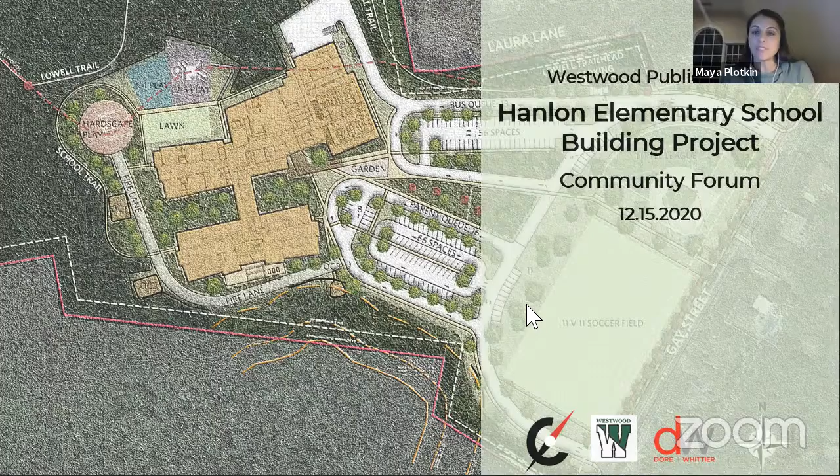So without further ado, I am going to turn it over to Rob Fitzgerald, who's going to kick off our presentation. Thanks, Maya. So tonight, we're going to give a little bit of an overview of the schematic design inspiration and an overview of the project itself. We'll talk about schedule and phasing, go over some cost estimates that we've just received, and then review next steps.

So just a little background on the project. Located right here is the existing Hanlon Elementary School site. And the proposed project is located here just behind it on the Shuttleworth property. The Shuttleworth property is about 37 acres and it's owned by the town. It's dedicated for municipal and school use. The proposed project is planned to encompass roughly around 9 acres, which will add to the approximately 8.5 acres of the existing Hanlon site.

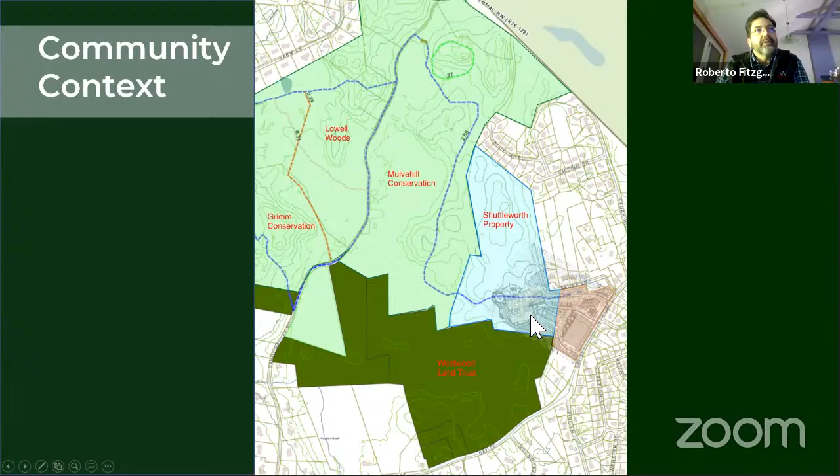One of the things we found when we were just starting to look at this property is that there's actually about 300 acres of wooded area conservation and trust land behind the Shuttleworth property. This really led us to take a closer look at those woods and use that as an inspiration for our design. So we took a walk through that area, looked at the materials, the stone, the earth, the wood, the colors, and so forth, and really took that and ran with it when we started thinking about building in a number of different ways.

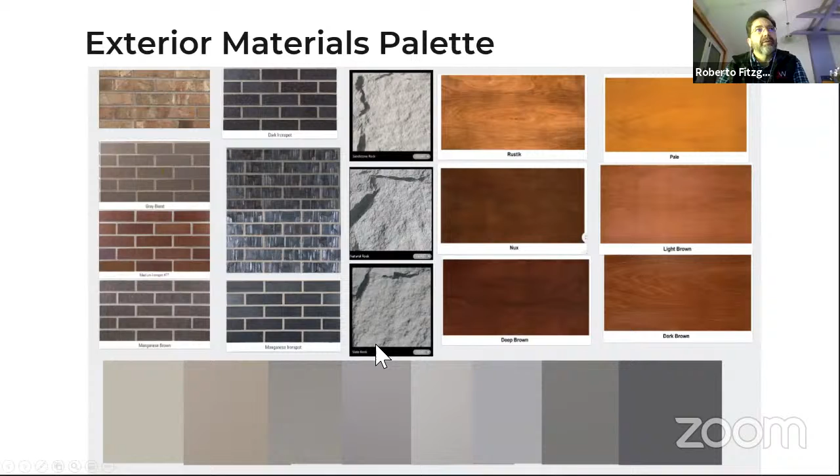One of the ways was, of course, the exterior materials, and so we started looking at trying to keep a neutral look with some grays and browns and wood type tones.

We began to look at different types of buildings, a variety of different types, and created an inspiration board. We shared that with the aesthetics working group, a subgroup from the school building committee, and invited the full committee to participate, then held a public community forum to share this and receive feedback. Through that whole process, we took a lot of information and feedback from the comments and integrated it into the design as it progressed forward.

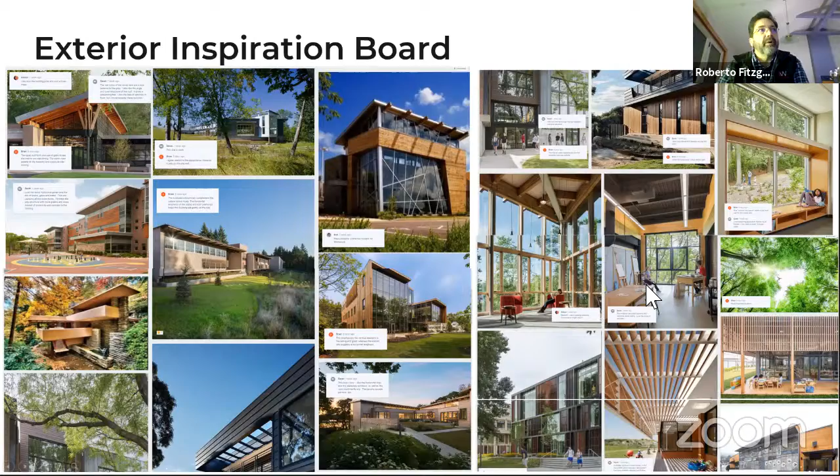Diving into the site plan, I'll give a brief overview. The existing school is this dashed black line that you can lightly see in this area, and the proposed building is over here to the west.

We're proposing a bus loop that would enter in from the north, loop around, and exit back out. And then a parent drop off, which would come in from the south, loop around, and exit out. What this does is allow us to have this walkway.

We know that with the existing Hanlon School there are a lot of walkers who go to the school, so it was important for us to create this unobstructed walkway leading up into the building for students. The other element is the athletic fields, creating this green band along Gay Street as part of the community aspect of the project, with easy access, providing a green park area for community use.

Then further into the site, we have the building. Speaking of the public areas, Maya will go over this a little more later in the presentation. But on this side of the building is the public or community side as well as student use. The gym is located here, the cafeteria is located here - these types of spaces like to have easy access to parking for after school events or weekend events.

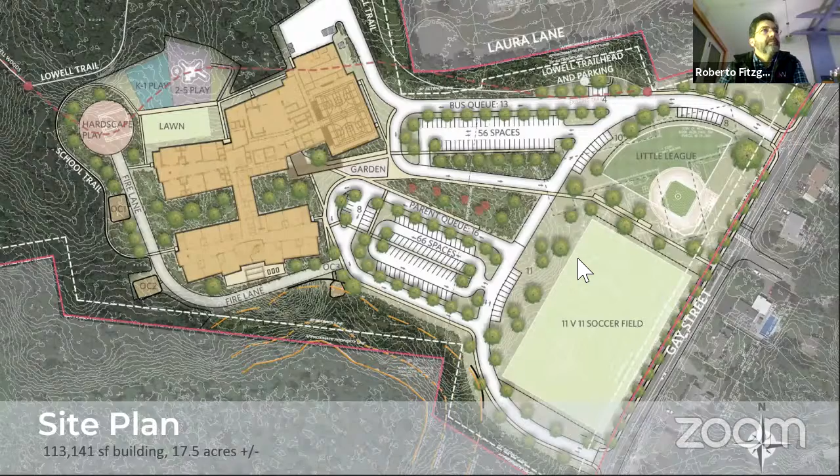One of the updates we have to the site plan was developed after continued discussions with the police and fire chiefs. The idea here is to extend this fire access road instead of having a turnaround space and exiting back out. There was a strong desire to provide a second means of egress out of that access road, so this extension provides a full loop around the building, just for an emergency situation.

Normally this would be closed off throughout the day at both ends, so there's really no traffic back there - it would only be used in an emergency type situation. There would be a hard surface play area that could be used by the school, close to the cafeteria, and then these play areas integrated into the hill.

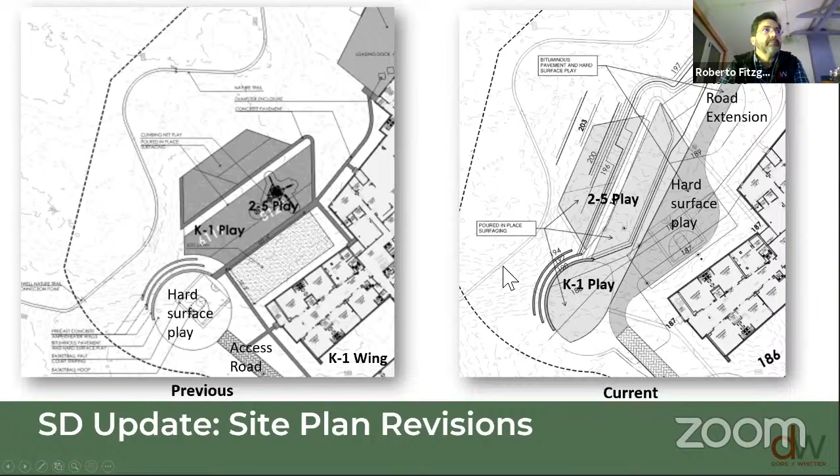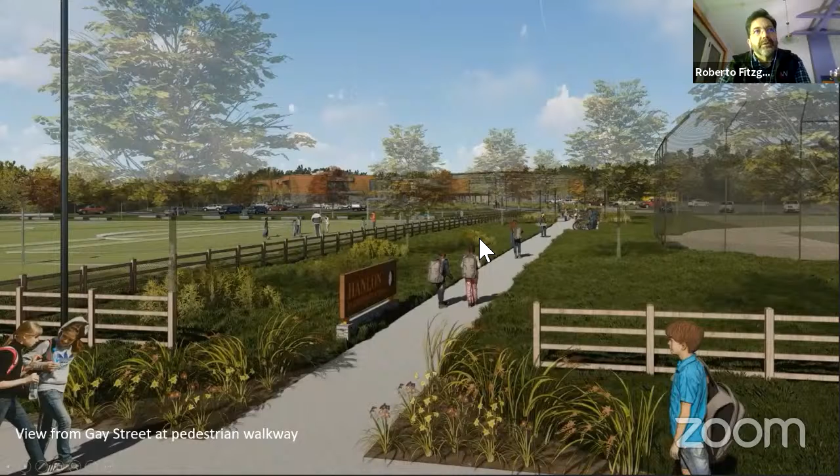And this is that walkway I was just talking about - again, trying to create an inviting access path for students to get to the school. This is about halfway up that path, and you can see the fields over to the left leading up to the building. This is a little bit further along.

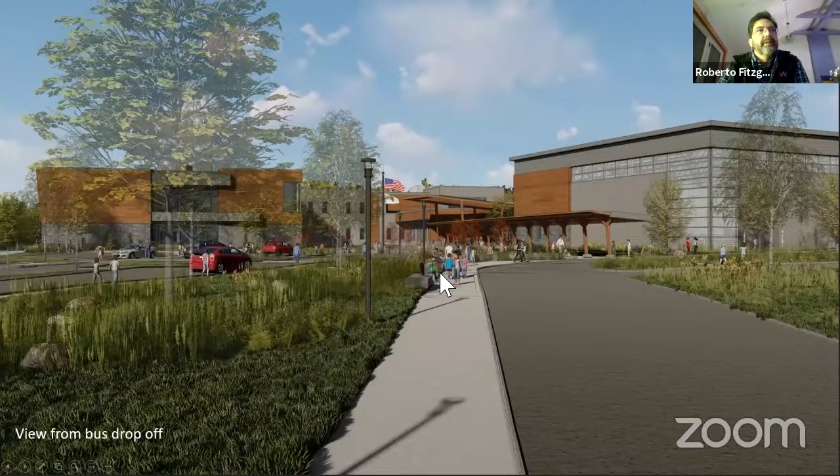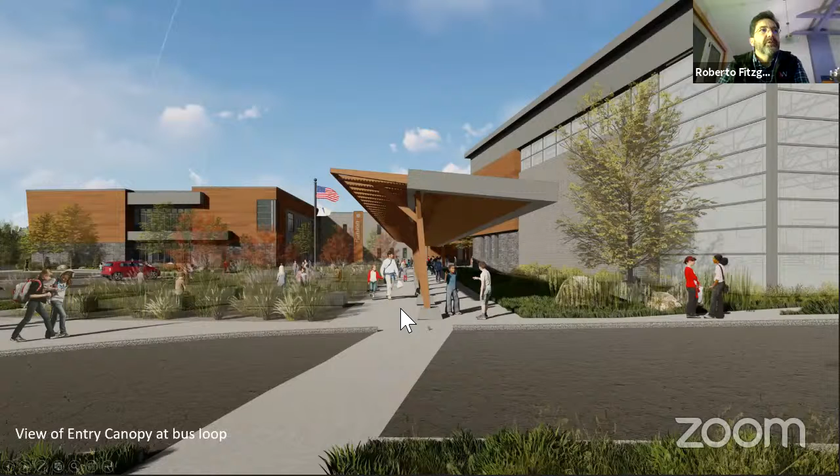This is a view from the bus loop looking at the main entrance to the building. The gym is on the right, and one of the classroom wings is over to the left. Then this is crossing the bus loop - it was important to create this entry canopy to really show and point to where the main entrance is into the building, and provide a covered area during inclement weather.

And then this is a view of the southern classroom wing. This area right here is the sort of outdoor classroom area we're calling the STEAM porch - science, technology, engineering, math, and art. The art classroom is located over to the left. This is a STEM lab, and then in the middle is a two-story library component.

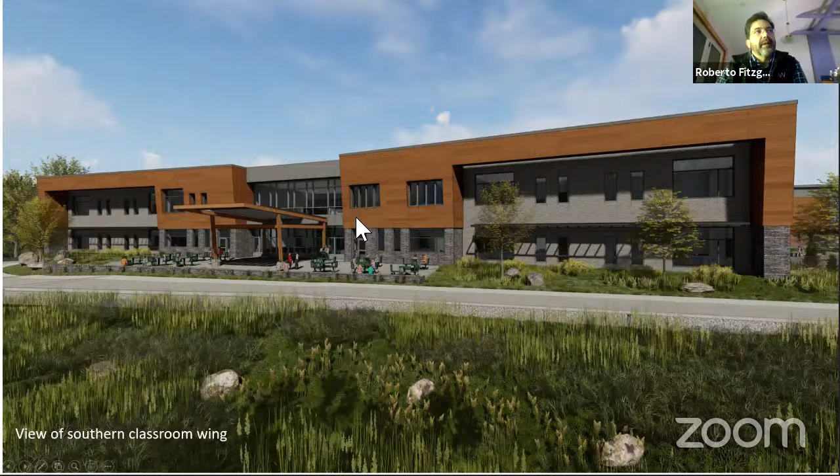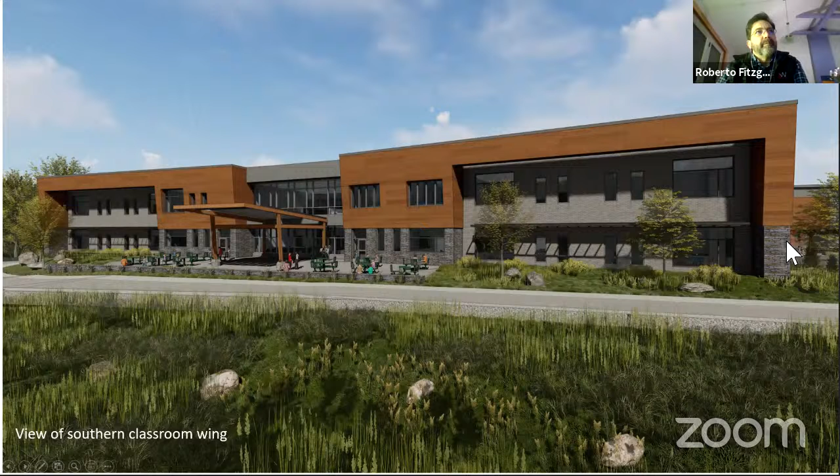As you can see, what we're doing here is integrating the solar shading into the design of the building, with these horizontal elements contrasting with the verticality of the trees. So the way the building is oriented, all the classrooms are either facing north or south, and that way we can control the light and shade into those classrooms throughout the day.

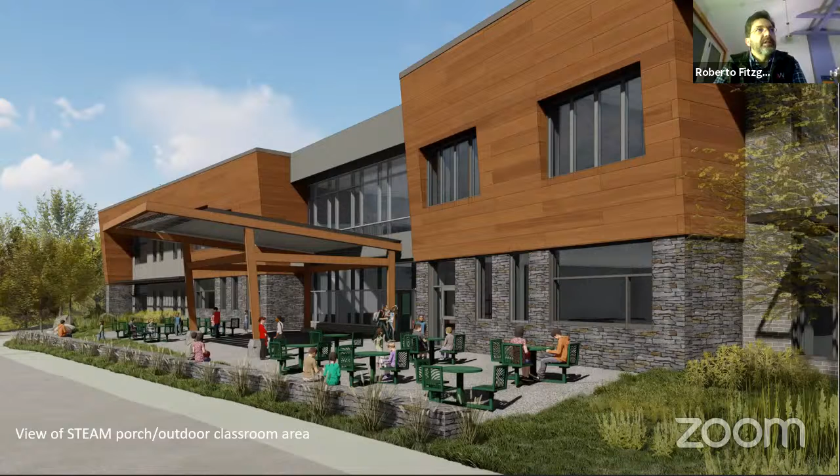This is a closer look at that STEAM porch. Planning to have some water access out there so that there may be some science activities that can be done, with teachers bringing students out as well.

And then this is a view of the building overall. So again, we have the gym here with lots of natural light coming in. These will be a special glass that's translucent, so it'll disperse the light in a nice, ambient way. Then this is that southern classroom wing I was just showing you. The main entrance is over here, then the cafeteria is in behind that.

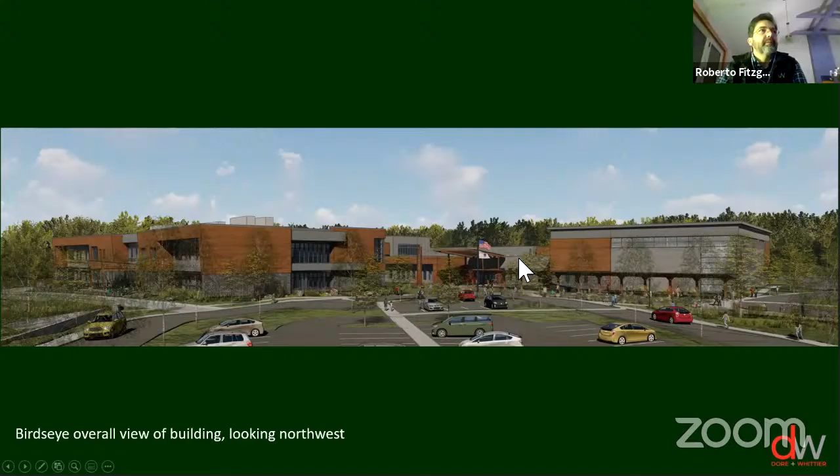So now looking at the floor plan, this is the sort of public or community side of the wing, when the building is used after hours. This here in purple is the extended day program, so they've got close access to the main entrance. When visitors come to the main entrance here, you have the administration area with a clear view to people coming in. Cafeteria, and two music spaces.

This is the kindergarten on the first floor and first grade on the second floor. The pink spaces represent various spaces for student support and special education, and these are kind of sprinkled around the building.

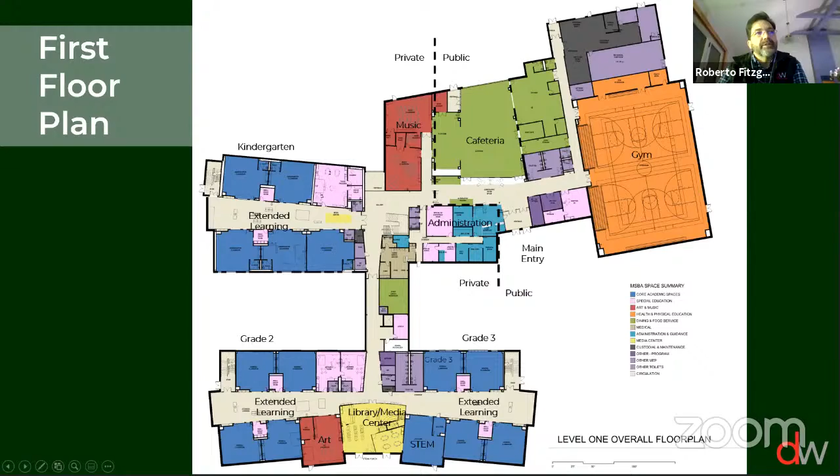Down here on the southern wing, we have 2nd and 3rd grade, and then 4th and 5th in the upper level, with the library media center in the center of the building as a destination, but also an integral part of the educational aspects of the wing, with close collaboration with art and STEM just adjacent to it.

And then moving on to the second floor, it's a very similar layout. So the idea behind the design of each of these wings is so that if you wanted to switch grade levels from one wing to another, you could do that - fifth grade can be on the first floor, for example, if that was desired. And then in the purple spaces are all either multi-stall or single-user toilet rooms.

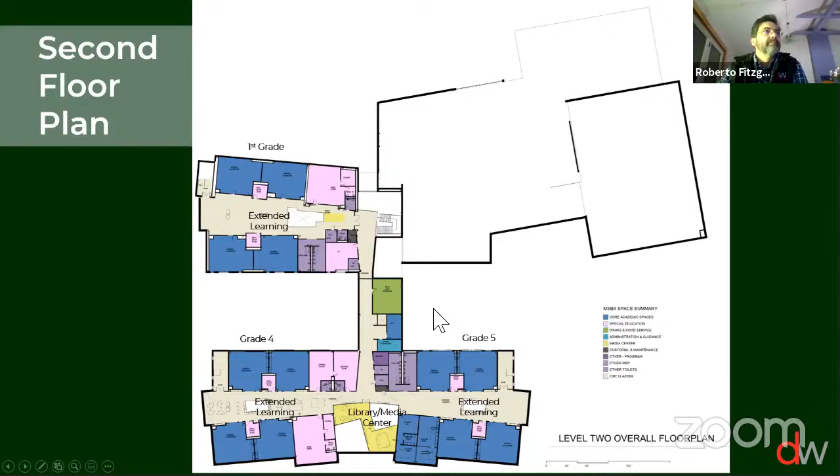So one of the main elements that's been integrated into the project from the beginning is the idea of integrating sustainability into the design. We met a large number of times with various members of the community, with members of the town. There's a sustainability subcommittee to the school building committee, and over that period of time, we've developed this project to be a net zero energy ready building.

So one of the main aspects of that is creating a building with very low energy use. This EUI is energy use intensity - right now we're tracking 21. We're working closely with Eversource, a utility company providing some incentives for staying under 25, and that's something we're actively striving to keep. Not only is it an opportunity to get some incentive money, but it's also an opportunity to continue annual savings through operation savings from low energy use.

We're planning for this to be a fossil fuel-free building, so we've got geothermal wells planned - it'll be all electric. We are integrating the photovoltaic infrastructure into the building, designing the roof so it can support photovoltaic panels when the school district is ready to determine that they want to put photovoltaic panels on it, and can easily achieve net zero energy with renewable energy certificates.

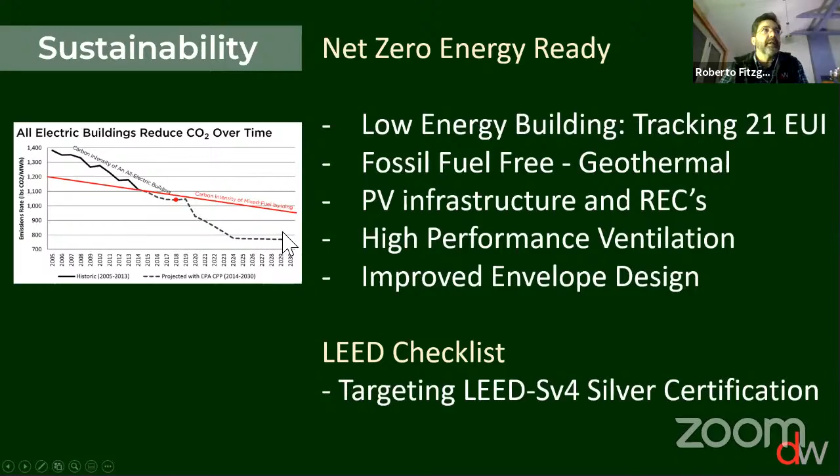So switching over to community use, I'll let Maya go over some of these slides. Thanks, Rob. From the start of this project, one of the things that was really important to us was the idea that this isn't just a Hanlon-Deerfield project, but that it's actually a Westwood project and the whole community benefits from this new school. So we wanted to give you a few examples of how we feel this building will serve the community.

As Rob mentioned, this building was designed to have public and private spaces. The public space is what the community could use after hours. The cafeteria has a performance space, which we'll show you, and the gym has opportunities to host tournaments. All of those areas can be accessed by the public, while we can easily lock off what we're calling the private or academic spaces. The public can come and go into the public spaces while we keep the academic spaces secure and not open to the public. You don't need to walk through any academic space to get to these public areas.

Just highlighting some things on this site plan: first we have the athletic fields, including an 11v11 soccer field. In the planning stages of this project, we had phone conversations with Westwood Little League, Westwood Youth Soccer, Westwood Rec Department, Westwood Basketball Association, the Westwood Athletic Department, Westwood Lacrosse - I think I'm missing someone. We spoke to all of these organizations because we wanted to understand the need in Westwood, what they felt they were lacking, and what would be nice to have. As a result, we tried to fit in as much as we could on this site.

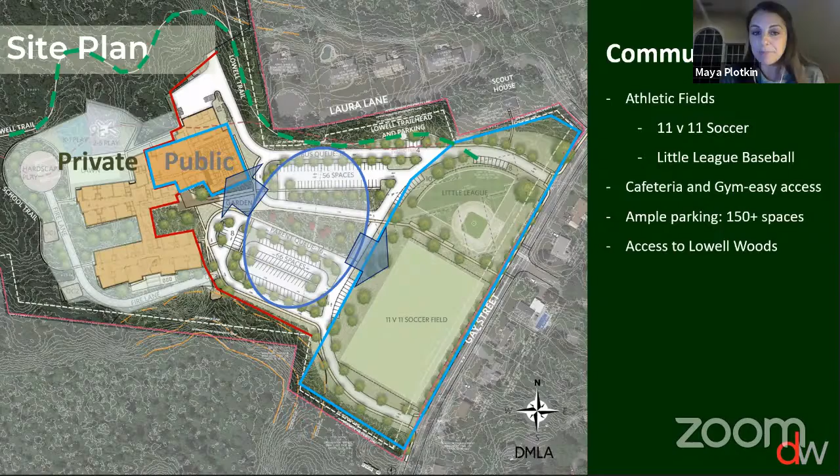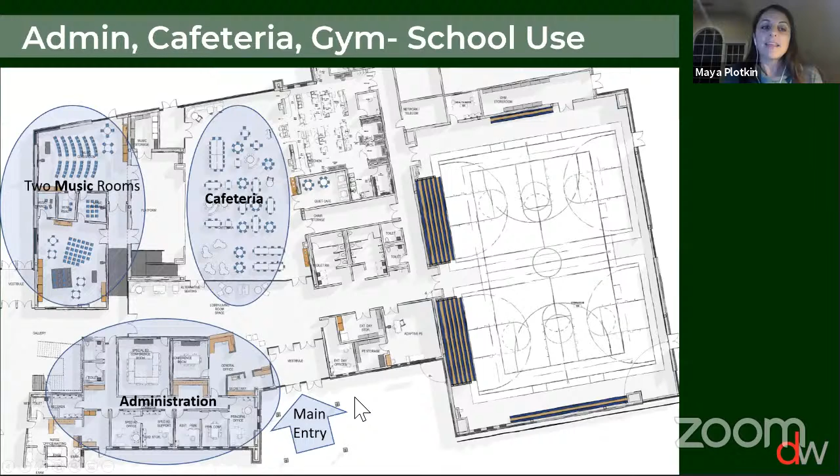So those are some of the community uses for the site plan. We want to take you inside now. This is how we would use the school during a typical school day: we've got the administrative portion, where the administrative assistant and principal sit, with some conference rooms there. We've got the cafeteria where kids will have lunch, two music rooms for music classes, and finally the gym, which would be used for PE.

Flipping to the next slide, you'll see how we will use it after hours, how the community can use this.

So first of all, if there's an event, you would walk into the vestibule and there's an area in the lobby where you could welcome people, you could check them into whatever event they're going to. The cafeteria is also a performance center.

So we're not going over the top with this. This isn't going to look like the auditorium at Westwood High, but it's going to be designed to be multifunctional. So it can not only be a cafeteria during the day, but also be a performance space at night, and also during the day when there's events at the school.

What we're calling the green room, which is one of the music classrooms, will serve that performance room. So actors will get ready in the green room and then be able to access the stage fairly easily. So that's a great option.

As you know, the Westwood High School auditorium and other areas are heavily in demand, particularly in the spring when there's lots of recitals. So this is just going to add to that inventory for the school to be able to offer.

The gym. So the gym is 3 times the size of the existing gym and double the size of what a typical elementary school would have as a gym. And this is absolutely by design.

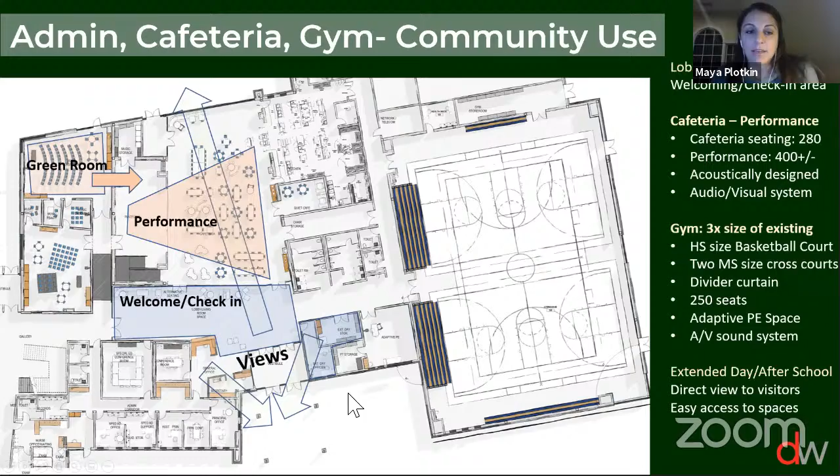And then the next slide. And so this is just an example of a classroom wing. And we just wanted to point out that these 2 could be used by the community.

The enrichment program during the summer, as you know, is usually held at the middle school, but this could certainly serve, this could be a place where we could hold enrichment classes.

The Westwood Rec Department has a lot of after school and summer activities, and again, they use district schools. So this would be a great place for the Westwood Rec Department to hold some of those events.

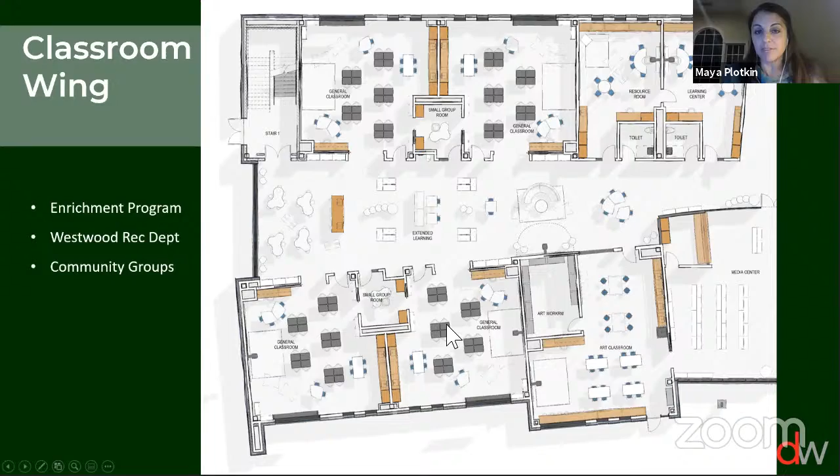And finally, we have various community groups that are always looking for space in our schools. And again, the classroom wings are a great place for them to be able to have their events as well. So that's just sort of a flavor of how we feel the community can really benefit from this building.

And with that, I'm going to turn it back over to Rob to talk about construction schedules.

So in terms of the schedule that we're in right now, we are right approximately here, just before the start of 2021. Over the next few months, we've got a submission of our schematic design package. There'll be an MSBA vote. And then in May and June are the planned town votes.

And then after that, we've got roughly 11 months of preparation, continuation of the design and preparation of the bid documents, going out to bid, and then roughly a 2-year construction period. So we've got phase 1 and 2 from July 2022 to February 2024. Right now, we're tentatively planning a move in March of 2024, and then finishing up the remaining portion of the site construction by August of 2024.

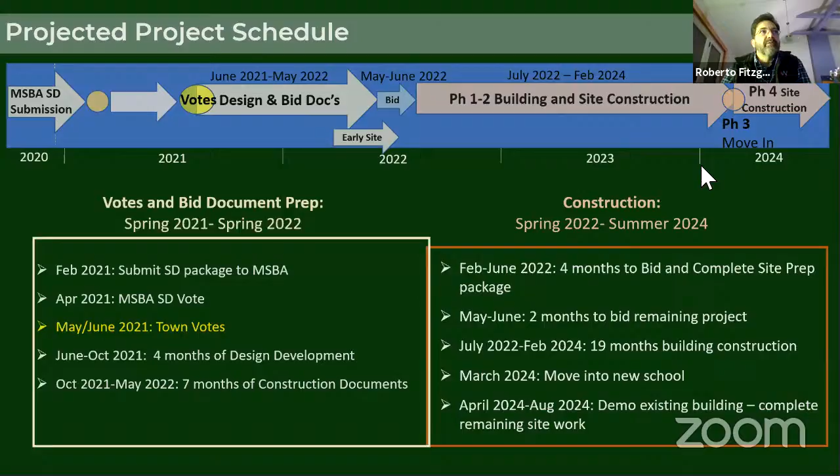So how that looks in terms of phasing.

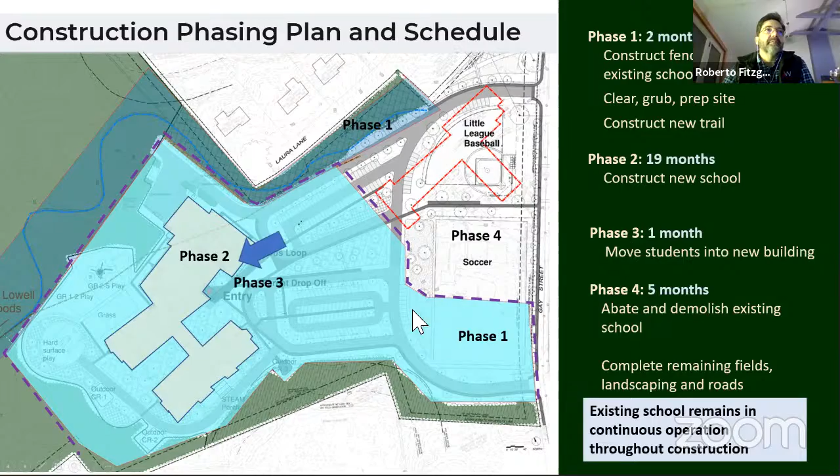So as I mentioned, we have received a couple cost estimates. And I'm just going to go over some words so that people have a clear understanding of what we're talking about when we talk about construction costs versus project costs and what alternates are. So construction costs are the costs associated with the construction of the site and the building.

So when we put together a set of drawings and specifications, we issue that out to bid. When we receive the bids in, that is the construction cost. It does not include the cost of furniture or furnishing the building, or say computers or other loose technology. Those types of costs fall under the soft costs, along with consultant costs for architects and engineers, the owner's project manager, commissioning agent, permitting, testing, and a number of contingencies.

So anything that's not built into the building basically falls under these soft costs. And the project cost is the sum of both of those combined. So that's the total amount that's presented to the public at the town meeting, and that's the amount that's being authorized to bond.

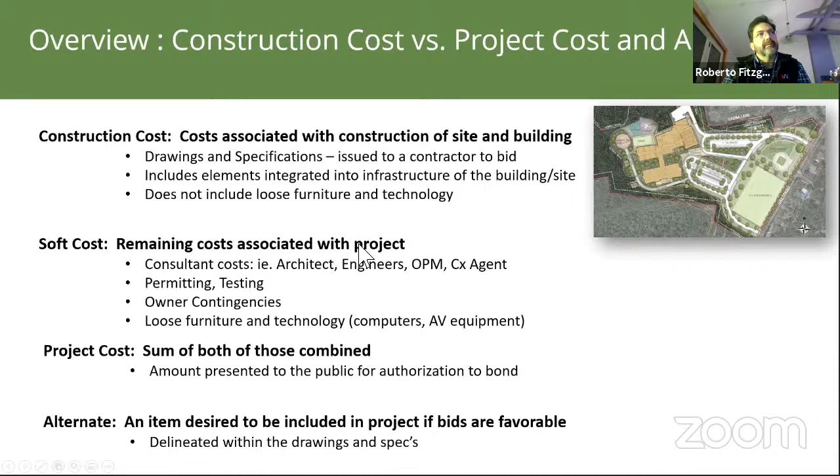And then the term alternate is used to describe any items that are desired to be included in the project. Let's say if the bids come in favorable, below what the expectation is, and it's determined that, hey, we can afford to take this particular item, and it can get incorporated into the project. So that's essentially the overview of that.

So the construction costs that we've been targeting, based on the previous cost estimates and the early study phases, is that we're seeking to come in at about 70.3 million with an 88.1 million project cost.

So we had cost estimates prepared by two different cost estimators, one that Warren Whittier hired and one that Compass hired, totally independent in reviewing the same set of drawings and specifications. And they provided cost estimates. One was a little lower and one was a little bit higher. And we spent a full day reconciling them through a reconciliation process until both cost estimators agreed ultimately on a reconciled number.

And so that reconciled number came to 71,068, which is about 686,000 above what we had currently previously targeted. And one of the reasons for that was since that original estimate, there were a number of things that were desired to be integrated.

One was using a natural gas emergency generator instead of the diesel. We integrated radon mitigation, primarily due to the amount of ledge that was found through the borings and test pits. The schedule was extended primarily due to the COVID change in dates for the town meetings. The access road connection that I discussed earlier, and then the amount of ledge that's being removed.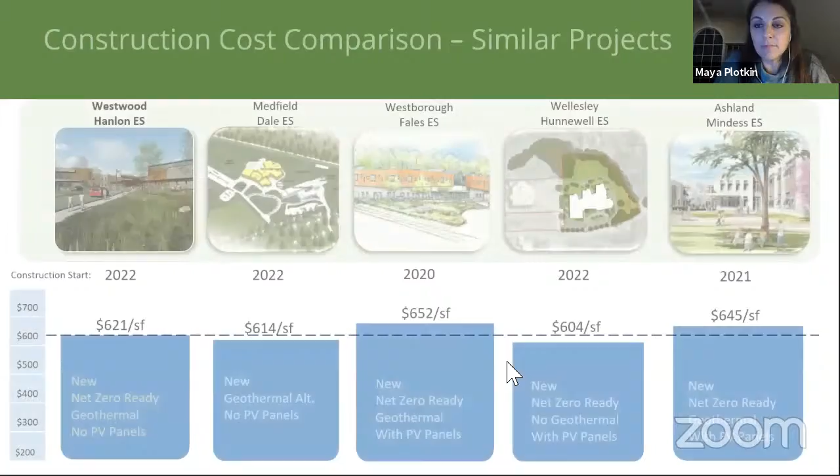And would you like to go over next steps, Maya? Sure.

So the next steps for the building project. Last night we had a joint meeting with the select board and the FinCom to give a very similar presentation than the one we're giving tonight. Tonight's the community presentation. Between now and January 22nd, as Rob mentioned, the school building committee is going to be looking at the budget and looking at some of these options and do some what we call value engineering, which means basically look to see where can we cut costs.

So we're going to be looking very closely at a number of options that have been identified by Dore and Whittier and Compass that we could take out of the project. Some are less painful than others, but we're going to be doing a deep dive to hopefully get back to our target number, if not below. And then at the January 22nd SBC meeting, we'll be voting on those options, whether to accept them or pull them out of the project.

On February 5th, the SBC is going to take a final vote. On January 22nd, we're going to review those options. We're not voting that day. We're actually going to wait a week, flush out some questions if anybody has any questions or needs a little more information. And then we will vote on February 5th on the budget and also on the overall schematic design submission that we will be submitting to the MSBA. This is the sort of final submission we have before the MSBA votes on our reimbursement amount.